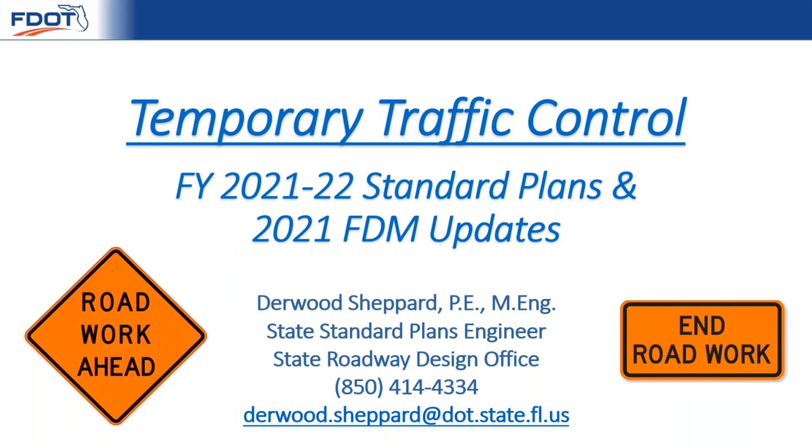Let me first start by explaining some of the reasons why the department has been making recent revisions to our temporary traffic control policy, standards, and specifications, and while we will continue to make needed changes to streamline current criteria and seek innovative solutions, the number one reason is safety.

As of the latest national data on work zone safety, the state of Florida currently ranks second nationally in work zone fatalities. As a result, Florida has become a focus state for the Federal Highway Administration, and the issue has become an emphasis area in the department's strategic highway safety plan. Of note, between 2016 and 2017, work zone fatalities increased by 3%, while all other highway fatalities were decreasing.

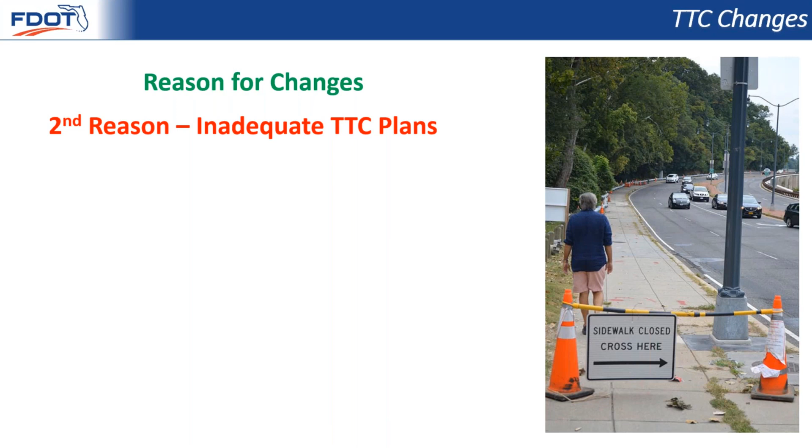The second reason for revisions to the temporary traffic control policy and standard plans is to address issues with inadequate temporary traffic control plans. This issue is primarily a construction contract plans related issue and deals with contract plans not having sufficient or consistent details.

However, there also tends to be a considerable amount of confusion between designers, inspectors, contractors, and maintenance personnel over their responsibilities, which can be attributed to redundant, misplaced, and contradictory information within the department's policy and contract documents, including the standard plans and standard specifications.

Furthermore, there has also been an over-reliance and misapplication of the standard plans typical applications, along with issues of consistency between the typical applications included in the standard plans.

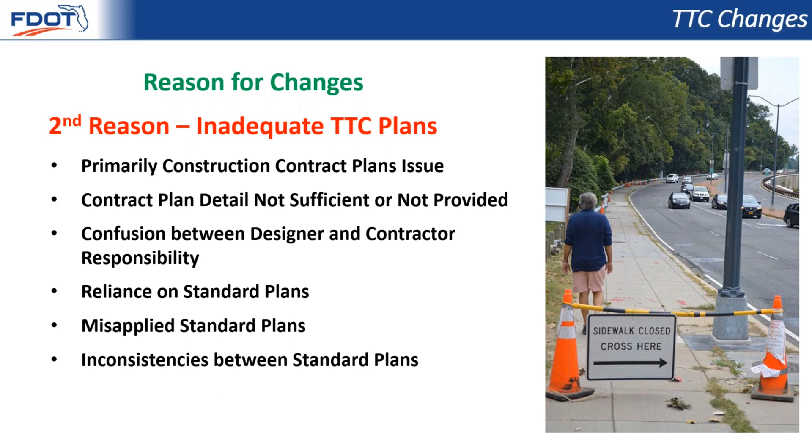Accommodating all users has historically also been an issue. Bike and ped accommodations have been left almost entirely up to the contractor to provide, and with little or no direction in the contract plans, proper accommodations are not being made.

Finally, we also want to try and reduce the amount of construction-related claims and pay item overruns. Through more consistent, simplified, and streamlined temporary traffic control standards, the department aims to better communicate intent, avoid redundancy, and better impress upon all users that the temporary traffic control typical applications are rudimentary and likely require supplemental project-specific TTC plans and/or proper judgment from the worksite traffic supervisor to sufficiently execute temporary traffic control operations.

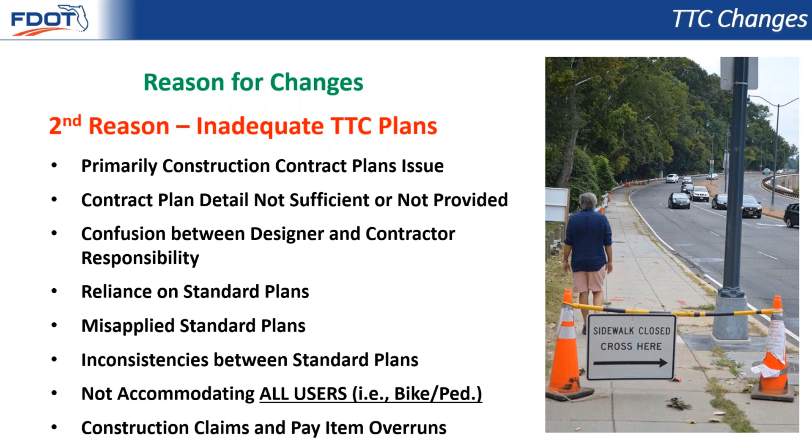As a general overview, I would like to take a few minutes to discuss some of the relevant governing documents pertaining to temporary traffic control operations on the state highway system. It's important to understand how these documents work together and how important it is to use these documents in combination with each other.

Starting with the standard plans, the first set of indexes included are 102-100, 102-110, and 102-120, which provide information for temporary barriers.

Then we have index 102-600, which includes the general information for traffic control through work zones and applies to all temporary traffic control operations on the state highway system, including but not limited to the standard TTC applications included within the remaining 102 series of indexes. That is, regardless of whether or not indexes 102-601 through 102-680 are used, the requirements of index 102-600 still apply.

Furthermore, indexes 102-601 through 102-680 include rudimentary standard TTC applications which cover common yet basic typical traffic control operation details. These rudimentary details work well for simple construction and maintenance operations, but often have to be used in combination with one another or supplemented with more specific project TTC plans.

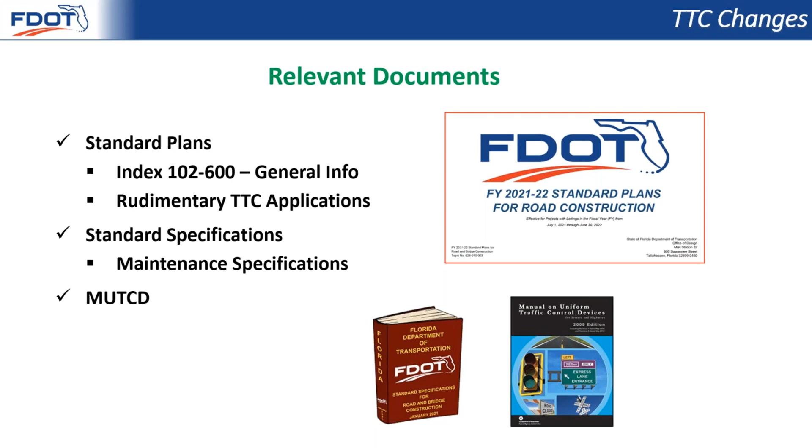In addition to the standard plans and specifications, there is the Manual on Uniform Traffic Control Devices, also known as the MUTCD, which includes the minimum requirements for all traffic control devices, i.e. signs, pavement marking, signals, and other traffic control. The MUTCD is the minimum national standard for all public roads and must be followed in accordance with the Code of Federal Regulations. Part 6 of the MUTCD provides the minimum requirements for temporary traffic control. While the standard plans and specifications have standardized and adopted many of the topics covered in the MUTCD, it is important to understand that some requirements are only found in the MUTCD.

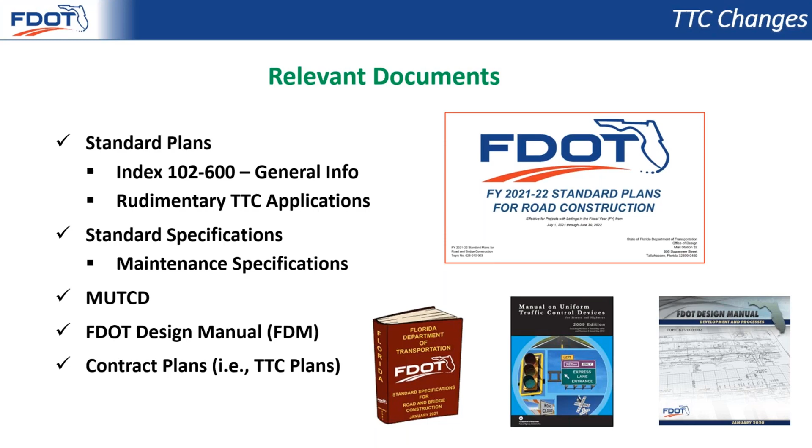Finally, there is the FDOT Design Manual, also known as the FDM, which provides the department's design criteria for transportation management plans and temporary traffic control plans included in the contract documents. FDM chapters 240, 241, 242, and 243 also include requirements for items such as lane closure analysis, traffic pacing design, portable changeable message signs, detours, guidelines for non-motorist accommodations, and temporary traffic control pavement markings, to name a few. The FDM requirements are to be used in the development of all TMPs and temporary traffic control plans used on the state highway system. The FDM and temporary traffic control plans are typically not needed for normal maintenance operations.

To highlight the importance of using all relevant documents, I wanted to provide a few examples of how the standard plans and specifications must be used together. The following examples are requirements only found in the specifications, and include the MUTCD reference for conditions not addressed in the standard plans or contract plan: the requirements to maintain business and residential entrances, vehicle and equipment visibility requirements, requirements for traffic control officers, and traffic control device requirements such as crashworthiness, PCMS deployment, arrow board requirements, TMA test levels, retroreflective sign sheeting, and pavement marking placement and material requirements.

Next, I would like to walk through some of the components of the changes and highlight some of the informational resources available to explain some of the primary changes that affected the entire 102 series of standard plans.

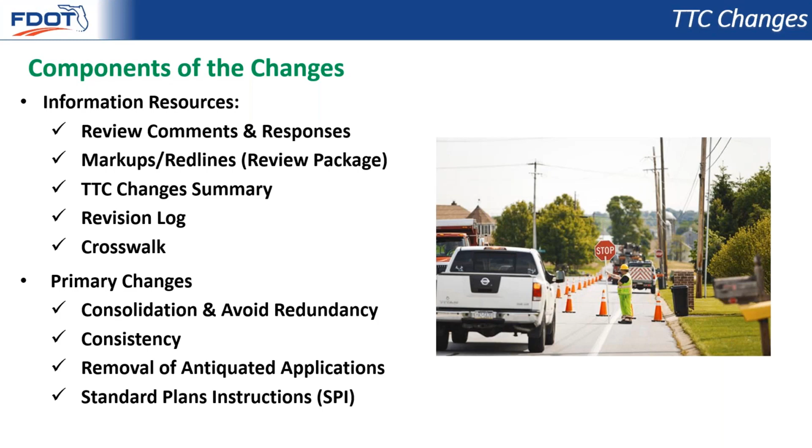The first resource I would like to mention is the review comments and responses included on the standard plans website. The review and response link on the standard plans webpage provides access to a complete list of all comments received during the standard plans internal, industry, and FHWA reviews, along with a response from the FDOT Central Office technical experts. These documents provide great examples of commonly asked questions during the review process. Some of these common questions and comments will be addressed throughout this webinar.

Also included in the review and response resources is a TTC Summary of Changes document. This summary document provides an overview of the changes made to each individual standard plans index in the 102 series.

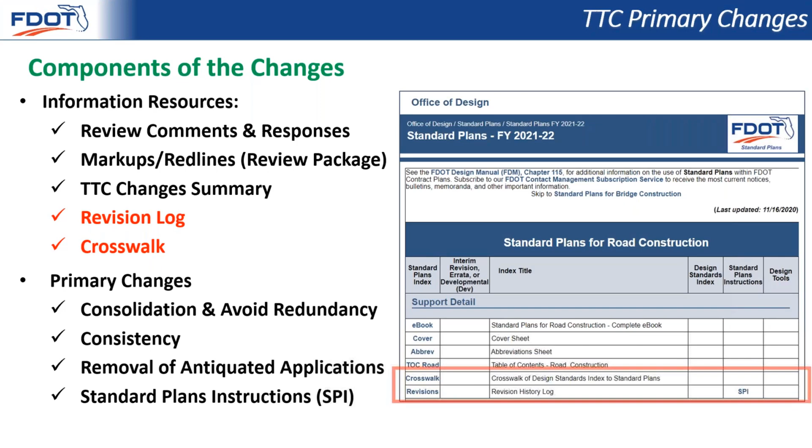The last two resources I'd like to highlight are the revision log and crosswalk. Both of these documents are included to provide information about the revision history for each release of the standard plan, and a crosswalk can be provided to be used when indexes are consolidated, renamed, or renumbered. As an example, Index 102-605 has been consolidated with Index 102-604. The crosswalk provides a resource for cross-referencing this type of information.

As previously mentioned, there are some overarching primary changes that occurred to the entire 102 series of indexes. These changes include consolidation of similar types of information to avoid redundancy in an effort to simplify and streamline the overall series. Removing redundancy helps to improve understanding of intent and avoids confusion, which can occur when requirements and details are stated differently in separate locations. Throughout the indexes, many of the redundant notes were removed, and in total, 12 indexes were consolidated. Consolidating information can help provide more consistency across the standard TTC applications.

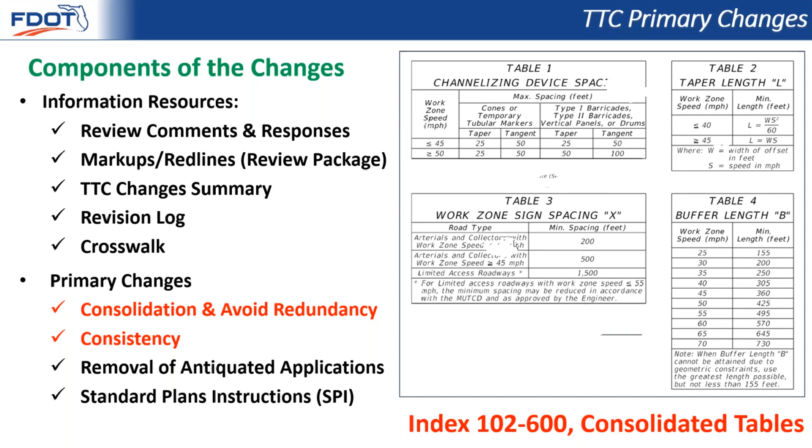One substantial example of consolidation is the consolidating of channelizing device spacing, taper length, work zone sign spacing, and buffer length tables to index 102-600. These tables now consistently apply to all of the standard TTC applications included throughout the 102 series, and by placing the tables within the general requirements of index 102-600, they now apply to all conditions included within the standard TTC application. This screenshot from 102-602 for work on the shoulders illustrates an example of how sign spacing dimensions are now consistently applied throughout the 102 series.

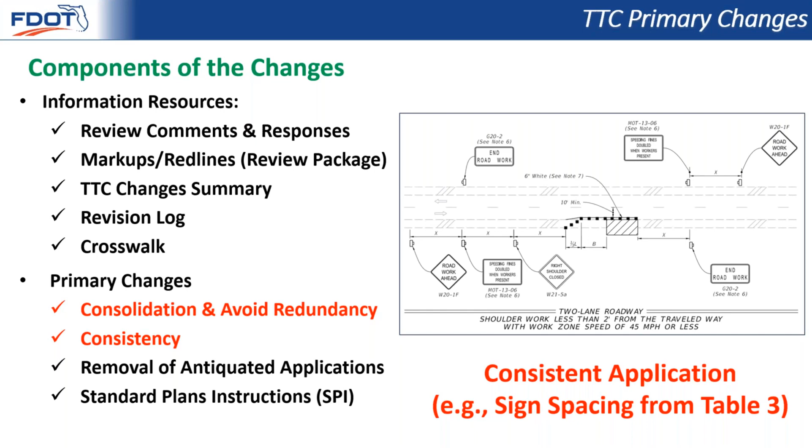Another primary change was the removal of antiquated or complex standard TTC applications. These include crossover details, which are the responsibility of the contractor to determine their internal traffic control plan for their equipment and vehicle movement; complex conversions or diversions, which would require site-specific TTC plans; and toll plaza operations, which are becoming antiquated with new tolling technologies. In total, 7 indexes were deleted.

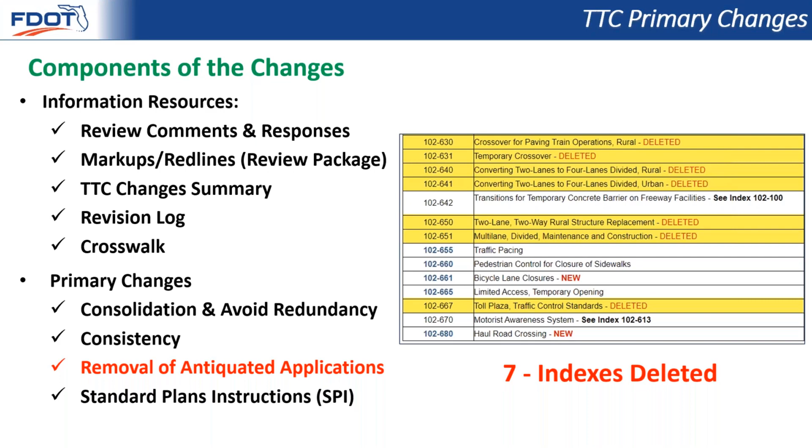The final overarching change to the 102 series is the addition of standard plans instructions for the entire series. Standard plans instructions are documents used to communicate the basis and limitation of an individual or group of indexes. The information includes design criteria used to create the index or indexes, assumptions and limitations for the use of the details, requirements for plan content needed to properly communicate usage in the contract plan, pay items used for the compensation of the details, and any other pertinent background information or examples that can be used to help with the user's understanding or implementation of the index's details. Shown is an example of the new 102 series standard plans instruction.

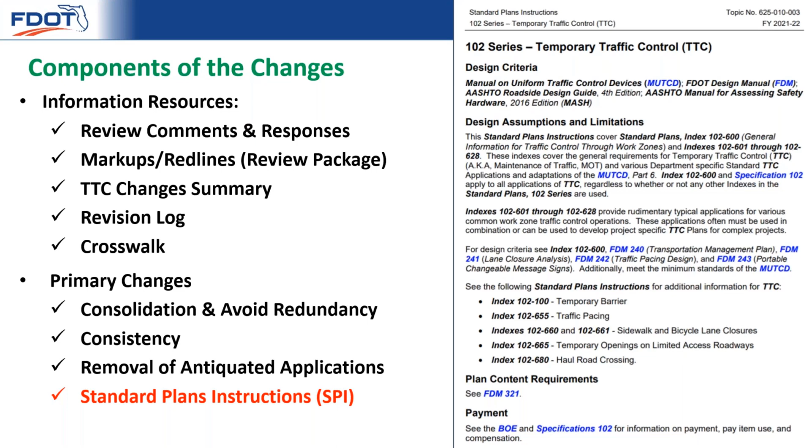I would now like to take some time to further highlight some of the specific changes made to the standard plan and address some of the common questions we received during the review process.

I previously mentioned the consolidation of device tables to index 102-600. However, I would like to take some time to show these tables in more detail.

Table 1 covers channelizing device spacing and provides a consistent yet conservative standardization of the device spacing guidelines included in the MUTCD. It should be noted that if site-specific conditions or issues arise, the worksite traffic supervisor or the engineer has the ability to alter channelizing device spacings to best suit the needs of the operation.

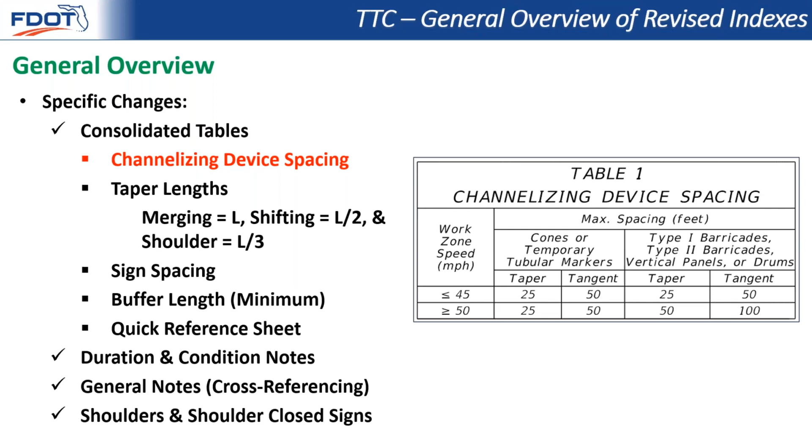Table 2 covers taper length. This table provides equations for the determination of the proper taper length for variable L. However, it is important to understand the consistent application of taper lengths throughout the standard plan.

As required by the MUTCD, taper lengths are detailed throughout the standard TTC applications as follows: the full value of L should be used for merging tapers. Shifting tapers use half the value of L, and shoulder tapers use a third of the value of L.

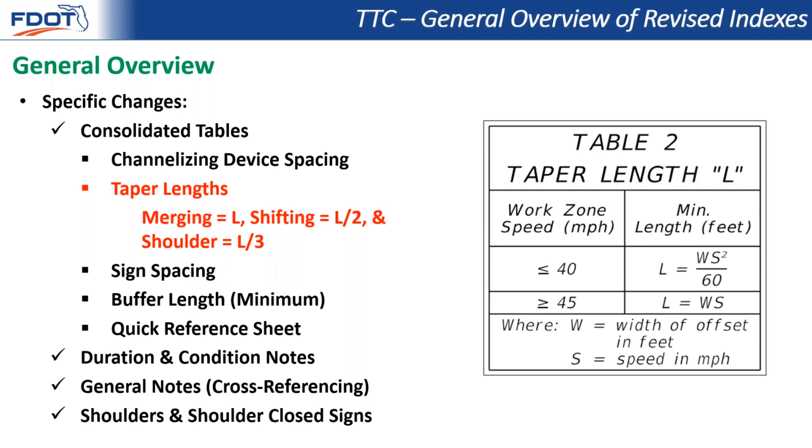One of the most significant consolidation efforts within the traffic control device tables involves Table 3, work zone sign spacing. These spacings are now indicated by variable X within the standard TTC application. These values will provide a consistent spacing for all temporary signs used within work zones and represent a standardization of the sign spacing guidelines included within the MUTCD.

One exception is made in the footnote, which states that for limited access roadways with work zone speeds less than 55 miles per hour, the minimum sign spacing may be reduced in accordance with the MUTCD and as approved by the engineer.

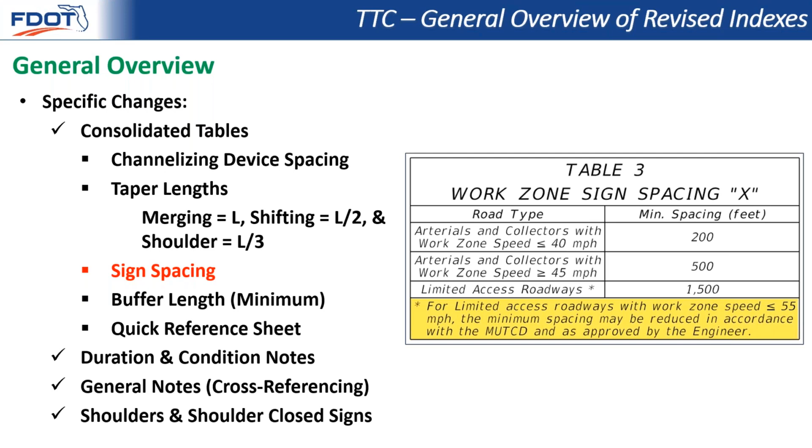Table 4 provides buffer lengths indicated by variable B. These values remain unchanged from previous versions of the temporary traffic control standard.

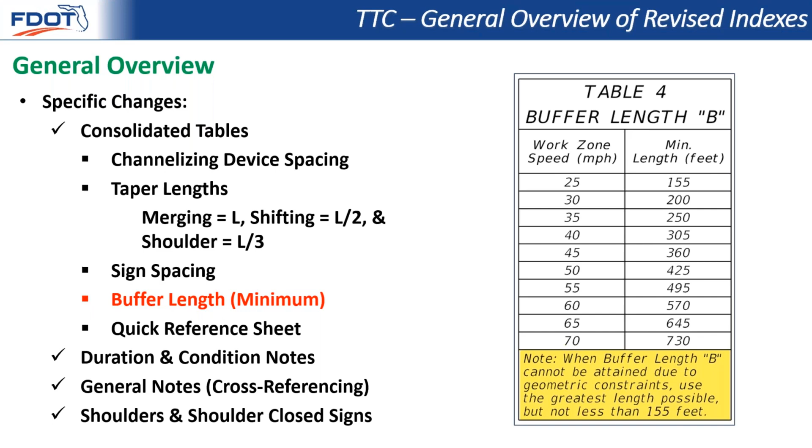The footnote included on Table 4 states that when buffer lengths cannot be attained due to geometric constraints, the greatest length possible is to be used, but not less than 155 feet. This note was previously included in the general notes of various standard TTC applications, but was inconsistently applied. Through inclusion on index 102-600, the note now applies to all standard TTC applications.

In an effort to provide a user-friendly version of the traffic control device tables, a quick reference sheet for the 102 series tables is available on the Standard Plans website at the link highlighted here. This quick reference sheet is provided in a standard 8.5 by 11 paper size format for easy printing as a reference guide by field personnel on a construction or maintenance job site.

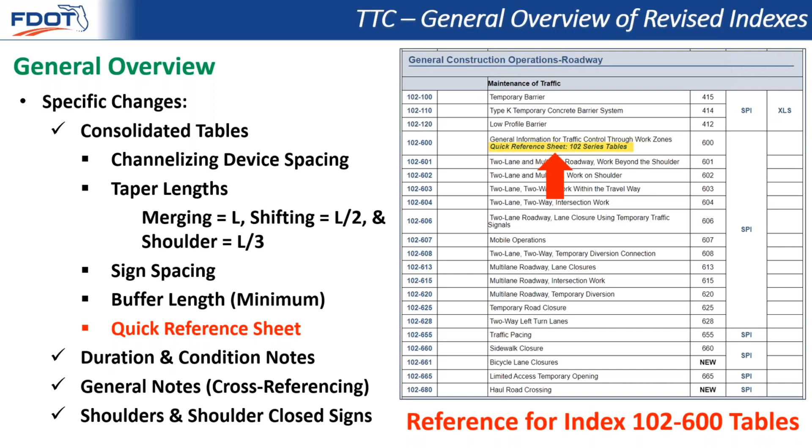Table 2 on the quick reference sheet includes the addition of example L values. As shown, these example L values are provided for common widths and work zone speeds, which range from 25 to 65 miles per hour and widths of 5, 10, and 12 feet to represent common paved shoulder and lane widths.

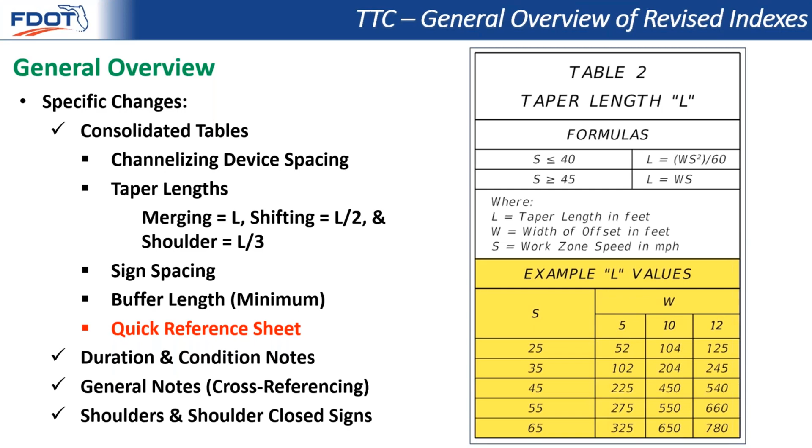It should be noted that these example values are provided to aid in common applications. However, for speeds or widths not provided, the equation should be used to determine the appropriate value of L.

The duration notes included in the previous standard plans provided operational time limits for conditions where various work zone traffic control devices may be omitted. However, it's important to understand that many of these duration notes have become outdated based on current requirements within the standard specifications, or they don't represent the department's current philosophy on best practices for advance notice of work zones.

For example, the standard specifications require all work vehicles and equipment within the work zone to have high intensity rotating, flashing, oscillating, or strobe lights in operation. Therefore, the usage of such devices no longer provides sufficient justification for omitting work zone traffic control devices. Likewise, road work ahead signs are now no longer considered optional based on duration.

The previous condition notes basically describe the details shown in the standard TTC application. However, these notes are considered redundant to the details and unnecessary, as the details in each index clearly illustrate the appropriate layout for the application included.

Where appropriate, the revised indexes now have general notes stating the intended usage for the application. For example, General Note 1 on Index 102602 reads, 'This index applies to two-lane, two-way, and multi-lane roadways, including medians of divided roadways with work on the shoulder.'

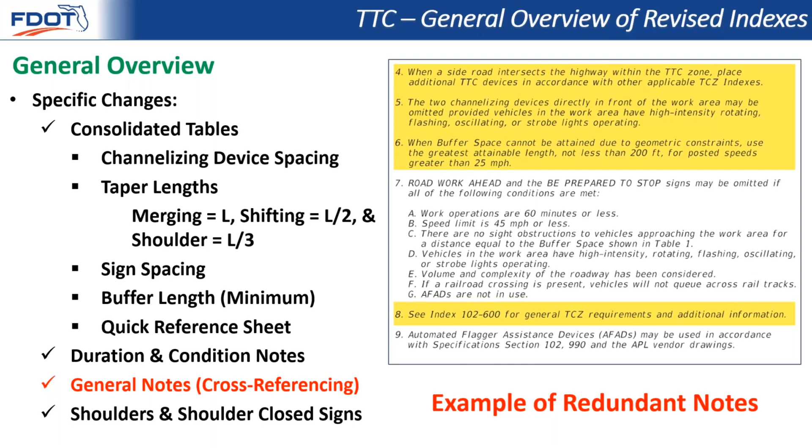The final overarching change I would like to cover is the depiction of shoulders and the use of shoulder closed signs throughout the 102 series standard TTC applications. As shown here in the new detail for a two-lane, two-way diversion, we now depict shoulders along the roadway and a continuation of those shoulders through the work zone. Maintaining shoulders through the work zone has historically been a part of our design requirements for temporary traffic control plans. However, shoulders were not previously specifically depicted within the temporary traffic control standard plans.

As with permanent conditions, providing shoulders through the work zone is a proven safety countermeasure for reducing crashes. The shoulder provides additional recoverable area for vehicles that depart their designated lanes. They help mitigate vehicles shying away from channelizing devices, and the shoulders also provide accommodation for non-motorists through the work zone. Both the FDM and standard specifications require that existing bicycle facilities must be maintained or detoured satisfactorily throughout the project limit.

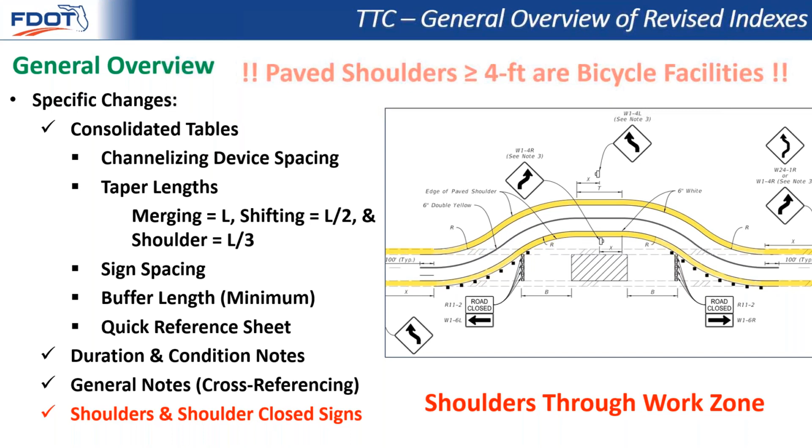Additionally, on the state highway system, with the exception of limited access roadways, all paved shoulders 4 feet or wider are considered a bicycle facility. Therefore, if an existing non-limited access facility has paved shoulders of 4 feet or more, the shoulder width is to be maintained through the work zone.

There are, however, certain roadway types and work operations where providing shoulder width is not practical. For example, a typical resurfacing project on a 2-lane, 2-way road using index 102-603 for work within the traveled way. This configuration would not have sufficient space to provide a shoulder on both sides of the 1-lane condition.

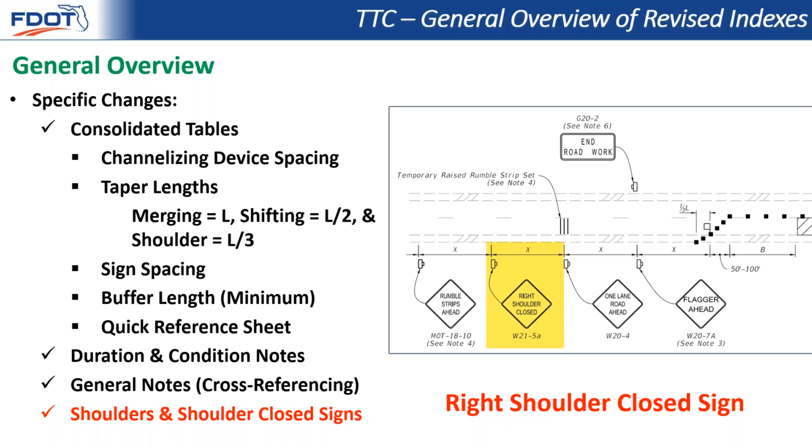Therefore, for conditions where providing shoulder width offsets is not practical, a right shoulder closed sign has been added to the advanced work zone sign array. As highlighted in the screenshot shown here from index 102602, the addition of the shoulder closed sign notifies motorists and non-motorists alike that the right shoulder is not available through the work zone.

The inclusion of shoulder closed signs within the standard TTC application does not absolve any responsible party for the requirement to provide non-motorist accommodations through the work zone. For short duration work, such as those common for maintenance operations, providing accommodations may not be practical or warranted. However, for long-term lane and shoulder closures, it may be appropriate to provide additional accommodation by means of a detour, diversion, or temporary path.

For this reason, every index within the standard TTC applications that have potential for impacting an existing bicycle facility, the note highlighted here has been added. The note reads, if the work encroaches on a marked bicycle lane or rideable shoulder, close the lane or shoulder in accordance with the plans.

This note is added to ensure that proper advanced consideration of bicycle accommodations is made during the planning and design phase prior to the execution of work operations. Rideable shoulder is referring to paved shoulders 4 feet or wider on non-limited access as mentioned previously.

Additionally, a new bicycle lane closure standard plan index has been created to establish standardized temporary traffic control devices for the closure of marked bicycle lanes and rideable shoulders. More information on this new index will be provided later in the webinar.

I will now walk through the 102 series and highlight some additional revisions made to the specific indexes. By and large, these additional changes cover topics not previously talked about.

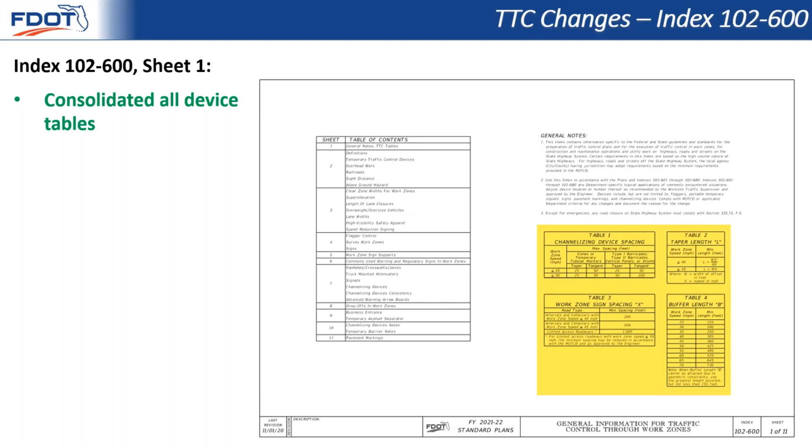Starting with index 102600, the first change highlighted is one we have discussed previously, but I thought it would be good and helpful to show you what the consolidated traffic control device tables look like, which are now included on sheet 1 of the general information index.

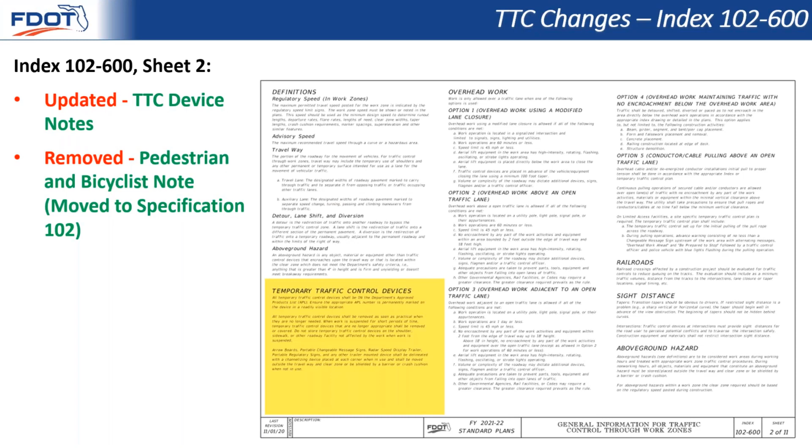On sheet 2 of Index 102600, there has been a revision to the temporary traffic control devices and pedestrian and bicycle notes. The temporary traffic control devices note has been updated to address the storage of traffic control devices when they are not in use.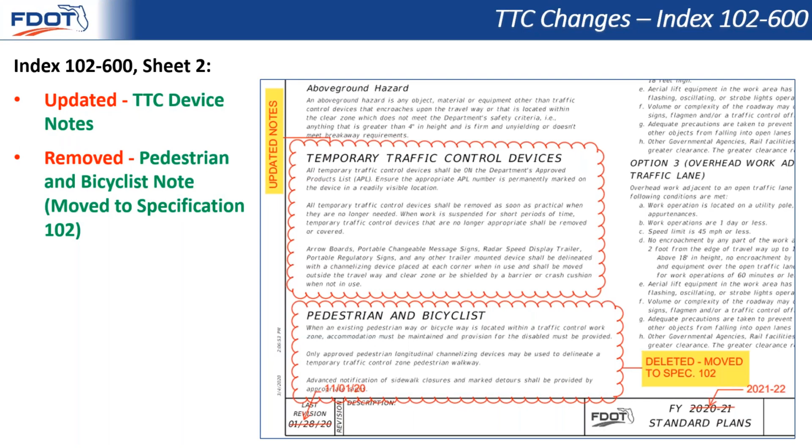The pedestrian and bicycles note was removed from Index 102600, and the information was consolidated with the bicycle and pedestrian accommodation requirements within standard specifications section 102.

The temporary traffic control devices note now includes the following additions: do not store temporary traffic control devices on the shoulder, sidewalk, or other roadway facility not affected by the work when the work is suspended.

This additional note was added to address issues with storage of temporary traffic control devices outside of the traveled way when staging for future deployment or when work is temporarily suspended. Devices stored on the shoulder, sidewalk, or other usable facility may eliminate existing accommodations for motorists and non-motorists alike, which is not acceptable.

On sheet 3 of Index 102600, a footnote has been added to the clear zone widths table. There's a minor revision to the lane widths note, and the notes for regulatory speeds in work zones have been revised to add a new detail for speed reduction signing.

The new footnote on the clear zone widths table reads: for temporary conditions where existing curb has been removed but not reconstructed, curb and gutter values may be used.

This note was added to address locations where the original and final conditions include curb. However, a temporary condition with no curb may exist. For this condition, it is often not practical to adjust the clear zone width requirements for the temporary condition.

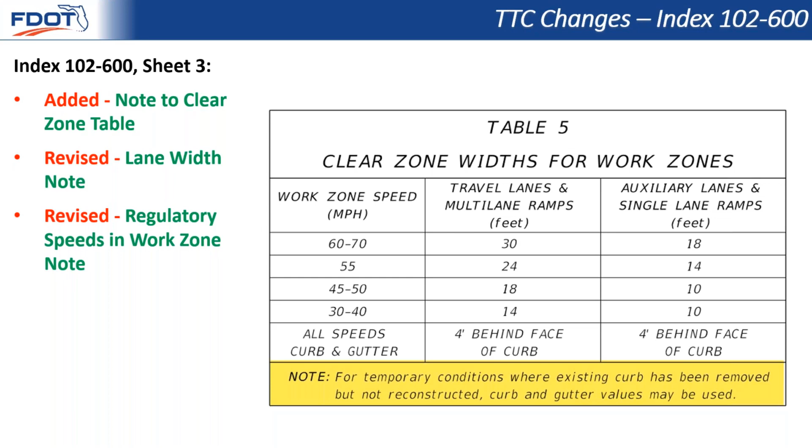The lane width note had a minor revision that changed the term freeways to limited access roadways, which is a more commonly used term within the standard plans and specifications.

The final change on sheet 3 of Index 102-600 includes revisions to the notes for regulatory speeds in work zones. The previous notes included a mixture of direction to the designers and the contractor.

The notes included requirements for designers to determine the regulatory speed during the development of the temporary traffic control plan, guidance on the placement of additional speed reduction signing, and direction to the contractor when they believed that field conditions warranted speed reductions different from those included in the temporary traffic control plan.

The revised details on sheet 3 now only include the details and notes necessary to install speed reduction signing. Criteria and guidelines for the establishment of regulatory speeds in work zones, as determined by the designer, are now included solely in FDM Chapter 240.

Since the standard plans are a construction document and the FDM is a design criteria document, it is more appropriate for criteria for establishing regulatory speeds to be located in the FDM. Direction to the contractor for the requirements of submitting a speed reduction warrant have been moved to standard specification 102.

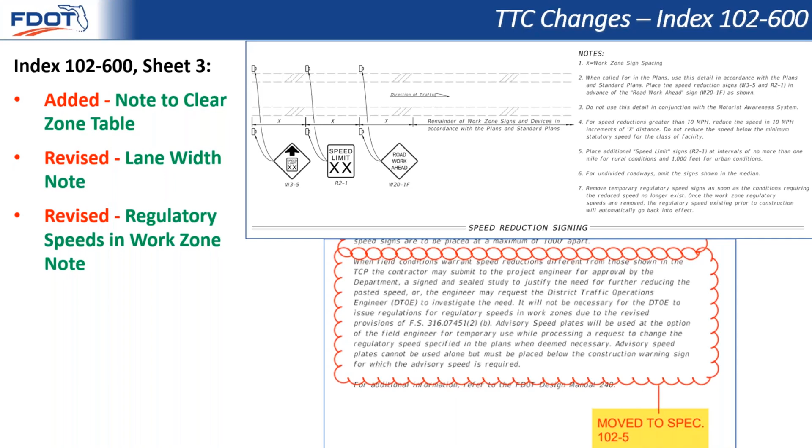On sheet 7 of Index 102-600, the notes for removing pavement markings have been deleted as the notes were redundant to the conflict pavement marking requirements included in subarticle 102 5.8 of the standard specification.

Additionally, the notes for signals was revised to remove the maintenance requirements for existing traffic signals because the notes are redundant to subarticle 102 9.15 and 102 9.16 of the standard specification.

Finally, the notes for portable changeable message signs were also deleted as the information is redundant to or consolidated with the FDM and standard specifications.

Sheet 11 includes the final change to Index 102-600, which now includes an added detail for RPM placement on multi-lane roadways. This detail was added to clarify RPM placement for conditions other than a 2-lane roadway.

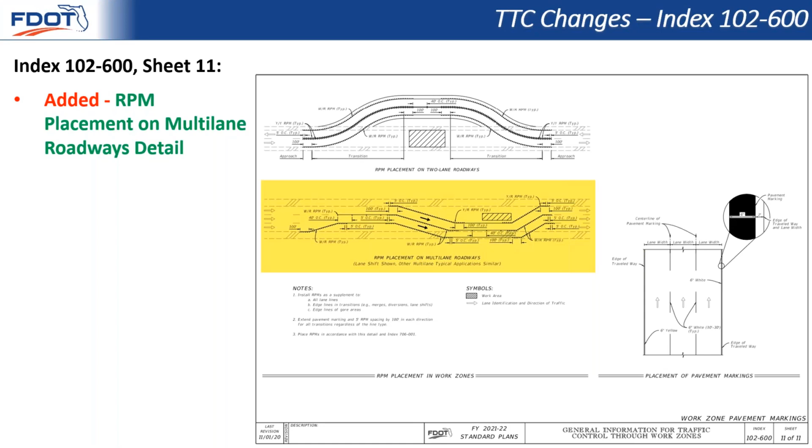I would also like to point out that RPM placement in work zones are installed as a supplement to temporary pavement markings. If temporary pavement markings are not required, then RPMs would also not be required.

Now we will start to cover changes to the remaining indexes in the 102 series and cover specific standard TTC applications. As stated previously, these standard TTC applications are rudimentary operational layouts of temporary traffic control devices. They are intended to provide solutions for basic operations and establish standard placement details for various configurations of temporary signs, channelizing devices, pavement markings, and other work zone related traffic control devices.

These standard TTC applications often have to be used in combination, supplemented by additional contract plan details and notes, or superseded by project-specific details for complex traffic control operations.

As we move through the remaining indexes in the 102 series, we will only be covering specific content changes that affect the individual index. The overarching changes covered previously in this webinar, that is sign spacing, device tables, and removal of redundant notes, will not be covered index by index.

The first index in the series I'm going to cover is Index 102-100. This index covers general temporary barrier requirements, which apply to all temporary barriers with the exception of low-profile barriers. However, it does include Type K barrier and any of the alternative temporary barriers available on the approved products list.

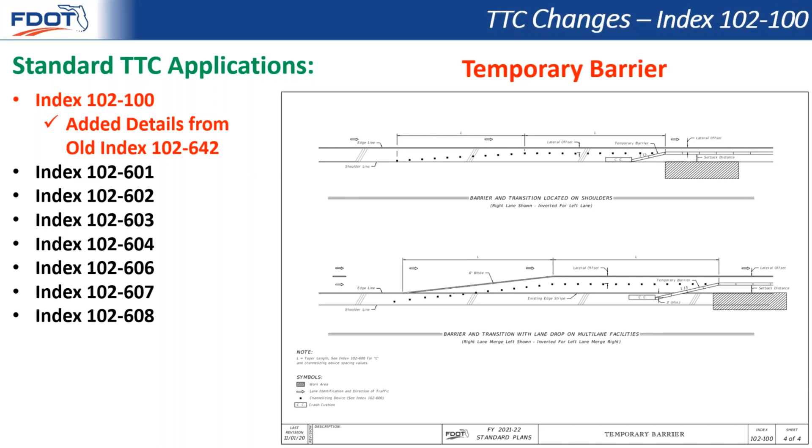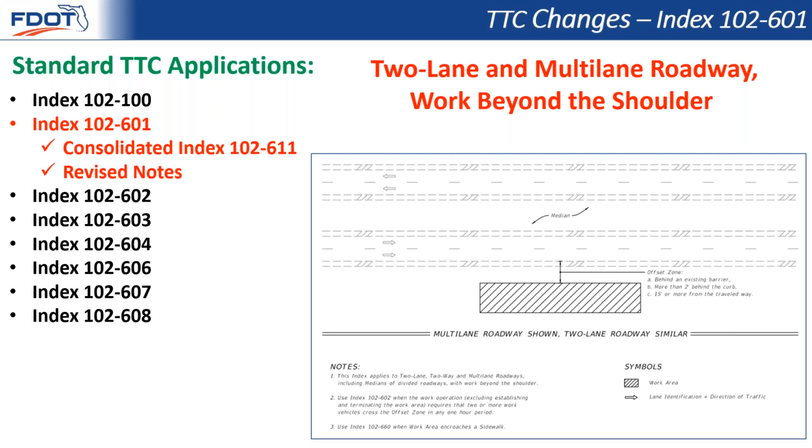Index 102-601 is the first in the series covering operational applications and covers work beyond the shoulder. The primary changes to this index included consolidation with old index 102-611 and retitling the index 2-lane and multi-lane roadway work beyond the shoulder. Both index 102-601 and 102-611 cover the exact same applications with virtually the same notes and details. Therefore, the applications have been consolidated for simplification and to avoid redundancy.

Like index 102-601, the operational details for work on the shoulder are very similar for both 2-lane and multi-lane roadways. Therefore, indexes 102-602 and index 102-612 have been consolidated into a 2-lane and multi-lane work on the shoulder index. There's also an additional scenario that has been added to index 102-602, which covers shoulder work less than 2 feet from the traveled way for work zone speeds 45 miles per hour or less. Previously, if work was within 2 feet, the only alternative was to close the lane. This additional application will provide some additional flexibility for low-speed roadways, but does require a lane width reduction to 10 feet.

We will now move to index 102-603, 2-lane, 2-way work within the travel way. This index covers a lane closure of a 2-lane, 2-way roadway using flaggers. The primary change within this index was the consolidation of the with and without details for temporary raised rumble strips into a single detail located on sheet 1. The conditions for which raised rumble strips are required has not changed. That is, for posted speeds 55 miles per hour or greater and work durations greater than 60 minutes. However, for simplification, one detail is provided illustrating a with temporary rumble strips condition, and note number 4 directs the user to eliminate the rumble strips ahead sign and associated sign spacing when they are not in use.

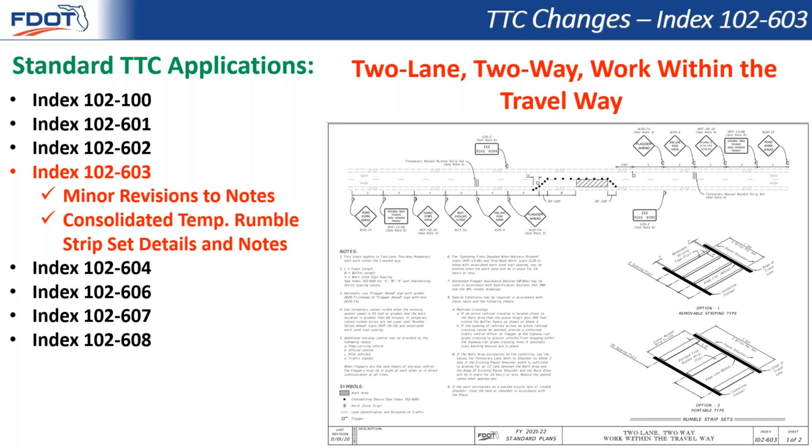The next index we'll cover is 102-604. This index covers 2-lane, 2-way intersection work and is a consolidation of old indexes 102-604 and 102-605, which address work near or within intersections. These details remain relatively unchanged.

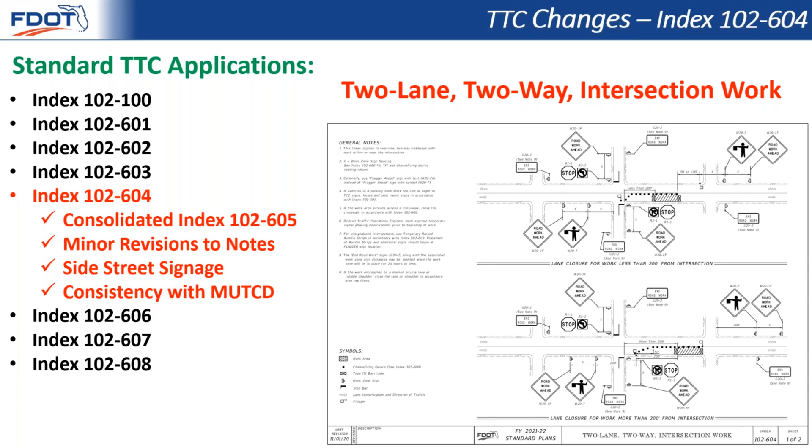However, there are a couple revisions to address side street signage to make the details more consistent with the MUTCD. As can be seen on sheet 1 of the new index, which covers work near an intersection, side street sign details have been added to address appropriate advanced warning and operational controls. The new signs included are the roadwork ahead, end road work, stop signs, and a restricted turning movement sign. These new signs have been added to clarify that flaggers should not be used to control multiple directions of travel, which would be a violation of the flagging procedures outlined in the MUTCD. That is, the flagger must always be facing the road user for which they are controlling. That would not be possible if the flagger is trying to control road users from side roads and the mainline roadway at the same time.

Likewise, the details shown on sheet 2 for work in an intersection have also been updated to include a flagger for each leg of the intersection for which the work zone is located. Again, this change is made to ensure that the flagging operations can be performed in accordance with the procedures outlined in the MUTCD.

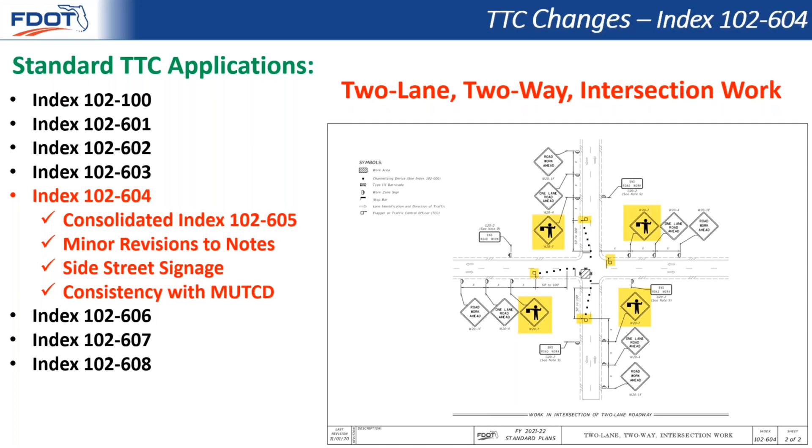Next, we will take a look at index 102-606 for a 2-lane roadway lane closure using temporary traffic control signals. Revisions to this index include the addition of temporary raised rumble strips and associated signing, and the elimination of separate details for bridges and side roads. Also of note, haul road details have been removed and added to a new index, which will be covered later in this webinar.

Highlighted here on sheet 1 are the additional temporary raised rumble strip details and a new intersecting side street detail. The temporary raised rumble strip details were added to ensure proper location of the devices and associated signage in relation to other advanced work zone signs. The side road intersecting the work zone detail, which provides a flagger control configuration for side roads, was added to provide a simple operational solution for side roads within the lane closure.

As you may recall, the previous index provided details for intersecting side roads, which utilized a combination of temporary signals and flaggers. However, those details would require a complete signalization plan for proper implementation and successful operation. While similar layouts would be a reasonable approach, they should be implemented with a project-specific TTC plan.

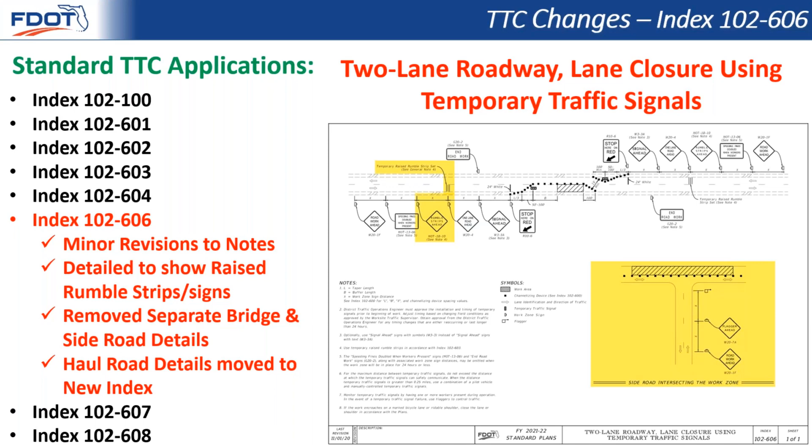The short bridges detail was also deleted from the previous index. Locating temporary traffic control devices at a bridge, regardless of length, is no different than determining site-specific layouts for other conditions. For example, when lane closures fall near tight horizontal curves, existing structures prevent placing signs in the ideal location, or tapers are extended to account for sight distance issues. Every TTC application is unique, and the standard plans cannot address all possible scenarios.

We will now review the changes to Index 102.607. The revisions include the consolidation of two-lane, two-way, and multi-lane mobile operations into a single index. Sheet 1, shown here, provides the general notes and operational details for two-lane work. Additionally, the general notes and details have been simplified to avoid confusion with the previous options for shadow vehicle placement and to provide a more consistent execution of mobile operations.

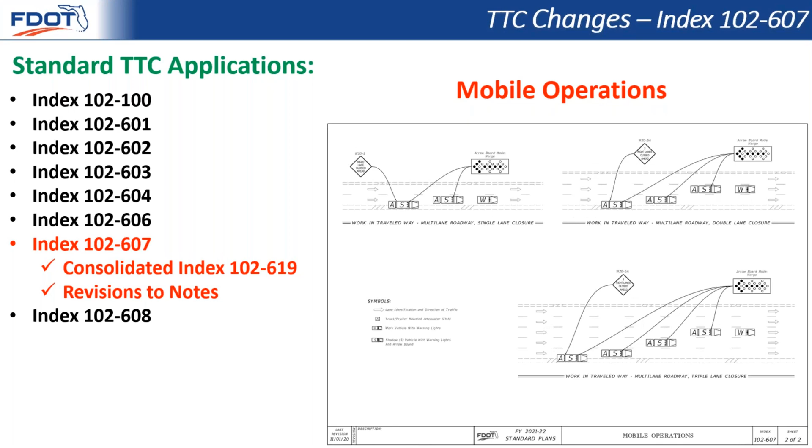The previous index had ranges and distance between work, shadow, and advanced warning vehicles. However, those have been removed, and Note 5 now directs the user to minimize the longitudinal space between vehicles to deter road users from driving between. Sheet 2 of Index 102.607 includes the multi-lane mobile operation detail.

Index 102.608 covers two-lane, two-way temporary diversions. As can be seen, there are no significant changes to this index otherwise than the overarching revisions mentioned previously. For example, simplified notes, sign spacing consistency, and illustrating shoulders through the work zone. It should be noted that diversions often require speed reduction signs to be added.

If applicable, the new reduced sign spacing details on sheet 3 of Index 102.600 should be used. I would also like to point out and remind you that applications such as this require a project-specific TTC plan to detail the geometric configuration of the diversion. Depending on the project-specific requirements, additional temporary traffic control devices may be needed. For example, temporary barriers or additional channelizing devices if the work area is within the clear zone of the diversion's traveled way.

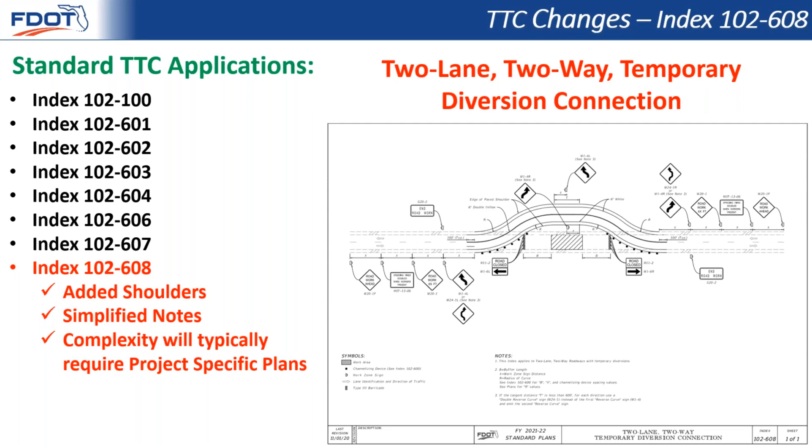The next index in the 102 series we'll cover is Index 102.613, multi-lane roadway lane closures. This index now includes a consolidation of all multi-lane lane closure standard TTC applications previously included within indexes 102.613, 102.614, 102.623, and the motorist awareness system details from Index 102.670.

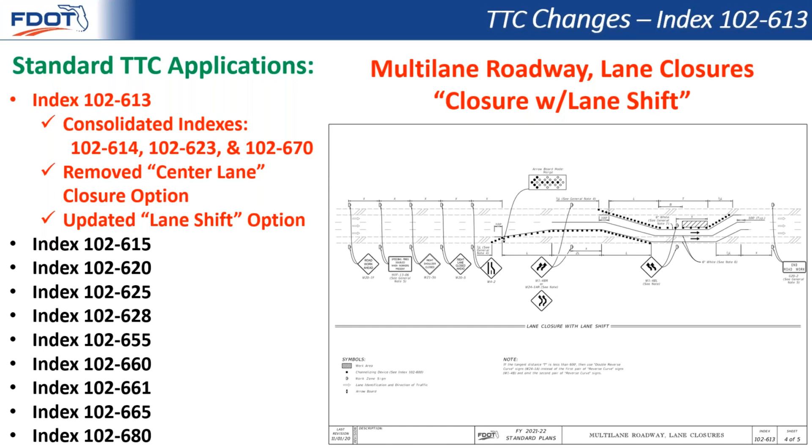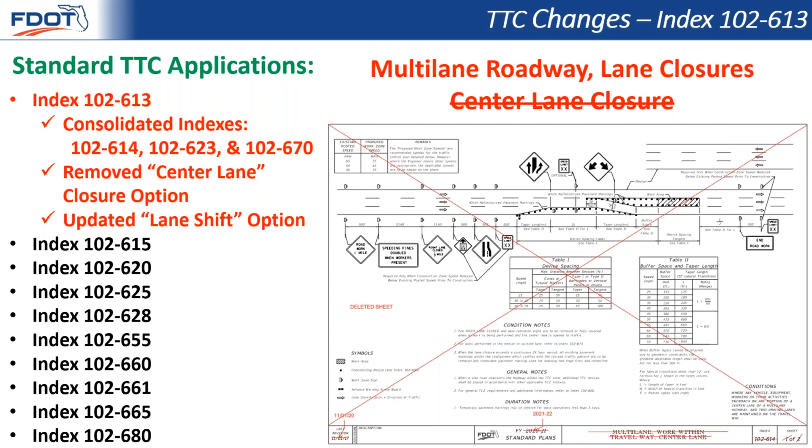Another revision that should be mentioned is the removal of the center lane closure standard TTC application from the previous version of Index 102.614. While center lane closures are an option in the MUTCD with typical application TA38, this is not a preferred option for the department. Therefore, the application has been deleted as an FDOT standard TTC application.

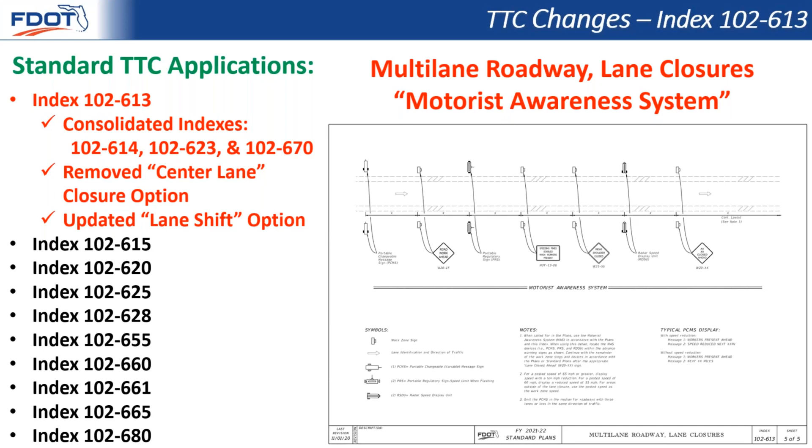Finally, for Index 102.613 is the addition of the Motorist Awareness System details, also known as MAS, from old Index 102.670. These details were simplified and added to the new Index 102.613 because the MAS is only used with multi-lane roadway lane closures and could only be used as part of the now consolidated options included herein.

As seen here, the details now simply show how the portable changeable message sign, portable regulatory sign, and radar display unit fit within the standard advanced work zone signage. The appropriate signing and channelization layout would then continue after the applicable W20 sign.

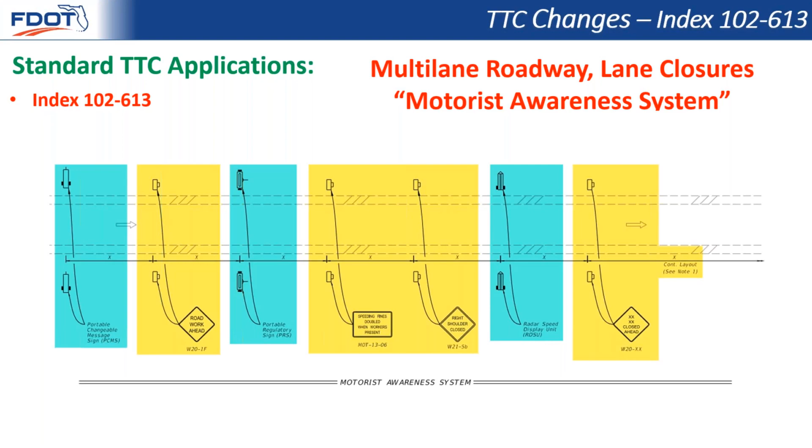The next index we will cover is 102.615, multi-lane roadway intersection work. As with the two-lane, two-way intersection work, all of the multi-lane intersection standard TTC applications have been consolidated, which include indexes 102.616, 102.617, and 102.618. All of the scenarios previously covered in these indexes are now included within index 102.615.

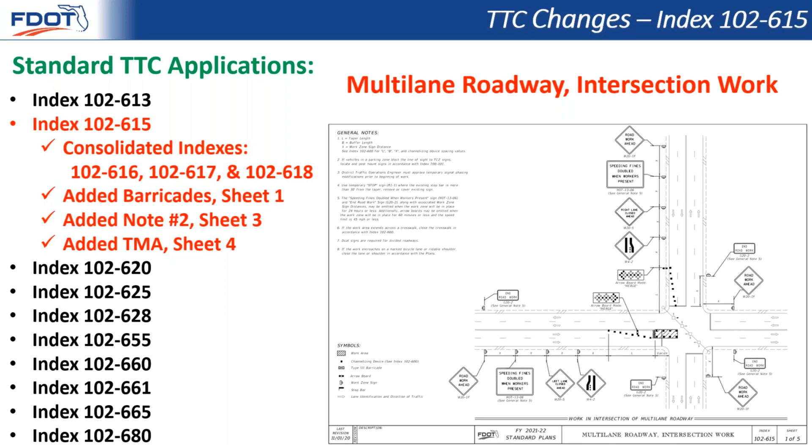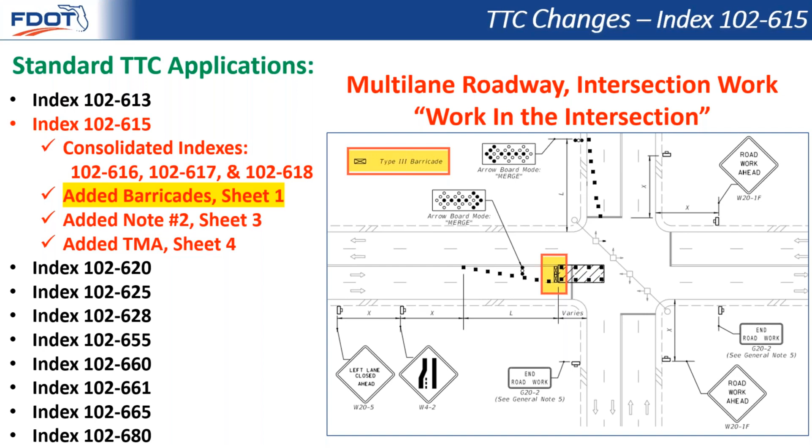There are, however, a few minor revisions to the previous details that I would like to highlight. The first is the addition of Type 3 barricades in advance of the work zone, as shown on Sheet 1, for work in the intersection. These barricades were not previously shown on the old Index 102.615 details, which was inconsistent with other standard TTC applications.

We have also added a new queue length reference and note on Sheet 3 for the application covering a left lane closure through an intersection where turning movements are allowed. As highlighted here, note number 2 now directs users to provide sufficient queue length so that left turning vehicles do not block the remaining through lanes. This language is consistent with the guidance given in the MUTCD.

The final revision to Index 102.615 is the application covering center lane closure shown on Sheet 4. This standard TTC application now calls for the use of a shadow vehicle and TMA within the buffer space in advance of the work zone.

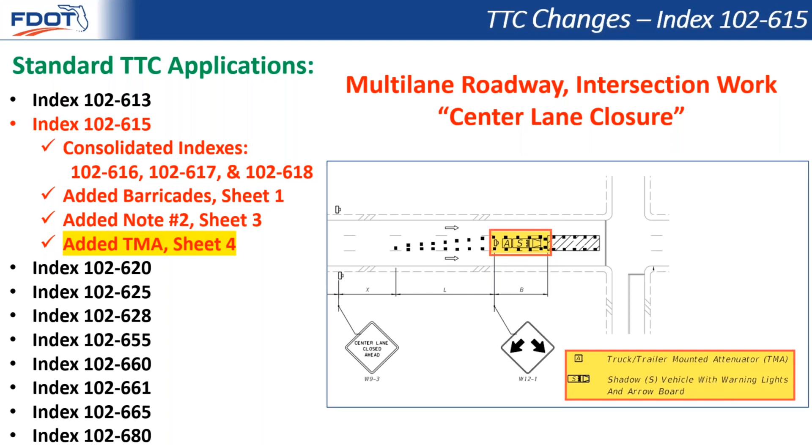We will now cover multi-lane roadway diversions included within Index 102.620. As with the two-lane, two-way diversion details discussed earlier, multi-lane diversions also require project-specific TTC plans. Therefore, Index 102.620 has been simplified to communicate the basic requirements for signage and channelization.

General note number 6, however, allows for a temporary lane separator to be used as an alternative for work zone speeds of 45 miles per hour or less. I would also like to again reiterate that site-specific diversion plans may require the use of additional temporary barrier or other temporary traffic control devices depending on the geometric layout and/or proximity of the temporary traveled way to the work area.

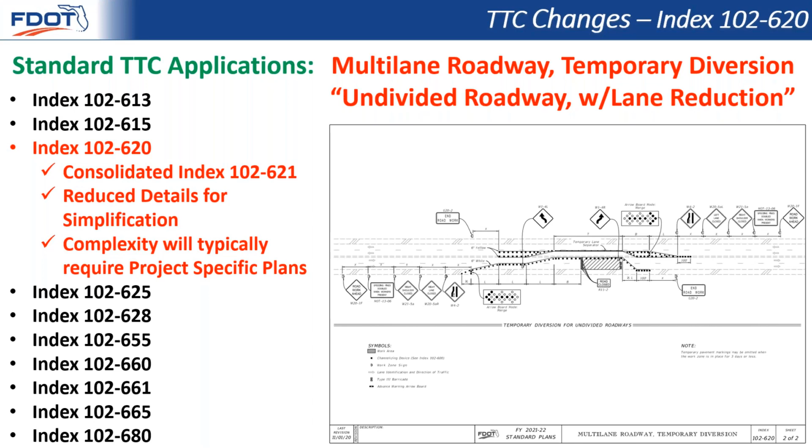Sheet 2 of Index 102.620 includes a diversion of an undivided roadway with a lane reduction in both directions. This detail is an adaptation of old Index 102.621.

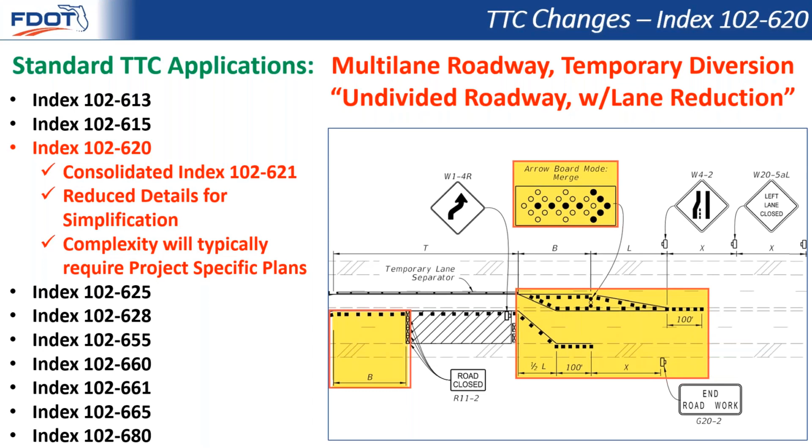As highlighted here, the details for the undivided roadway diversion were revised slightly. A buffer space was added to the near side approach to the work area, and the channelizing device configuration on the right side of the detail was also updated for consistency with other standard TTC applications in the MUTCD.

Index 102-625 covers temporary road closures. The details and notes were simplified for consistency with other standard TTC applications in the 102 series.

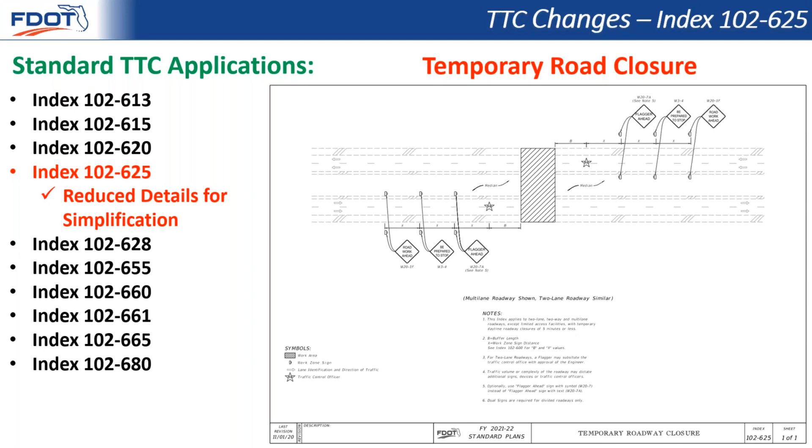Index 102-628 covers roadways with two-way left turn lanes. This index previously only covered the closure of the turn lane, which most often did not provide for a practical work area without encroaching into either one or both inside lanes.

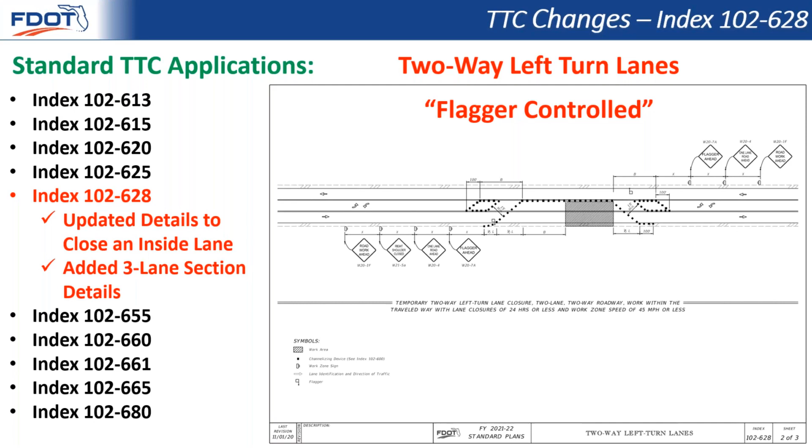The index was also expanded to include new standard TTC applications that cover 3-lane sections. That is, a 2-lane, 2-way roadway with a 2-way left turn lane. The first application shown here on Sheet 2 provides for a 2-way flagger controlled operation.

And Sheet 3 provides an application for the closure of one through lane and shifts traffic into the 2-way left turn lane. Both of these new standard TTC applications are limited to operations with durations of 24 hours or less and work zone speeds of 45 miles per hour or less.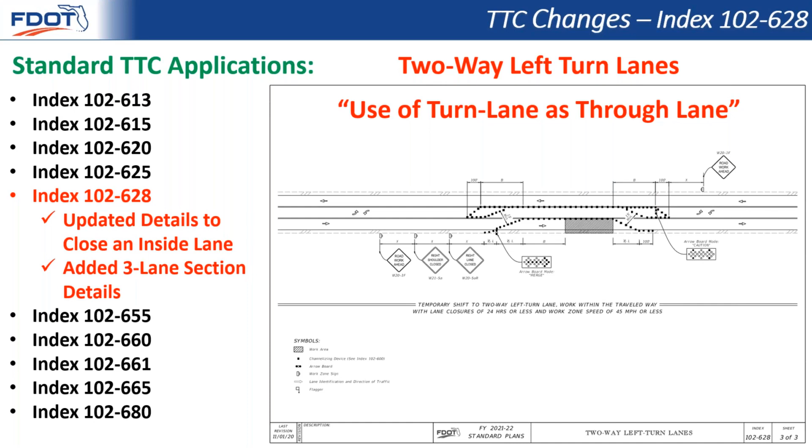As such, Index 102-655 was updated to include only the standard information needed to execute a traffic pacing operation in concert with the temporary traffic control plan.

It should also be noted that the examples that were previously included on sheet 2 of the old index were moved to the standard plan's instructions provided along with the index on the standard plan's website. Since this information was intended to provide helpful guidance on how to initiate the operation and not the required procedure, the standard plan's instructions are a more appropriate location for the examples.

The next index we'll cover is 102-660 for sidewalk closures. This index provides very basic requirements for the advanced sidewalk closure signing and traffic control devices needed for a pedestrian detour, a temporary pedestrian path, or a temporary diversion into the traveled way.

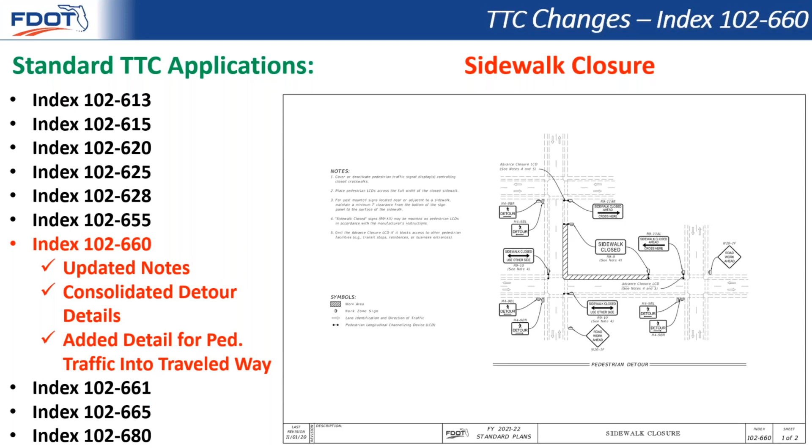Sheet 1 shown here includes the pedestrian detour. Sheet 2 provides the temporary pedestrian way detail and a new detail for temporary pedestrian diversion into the traveled way.

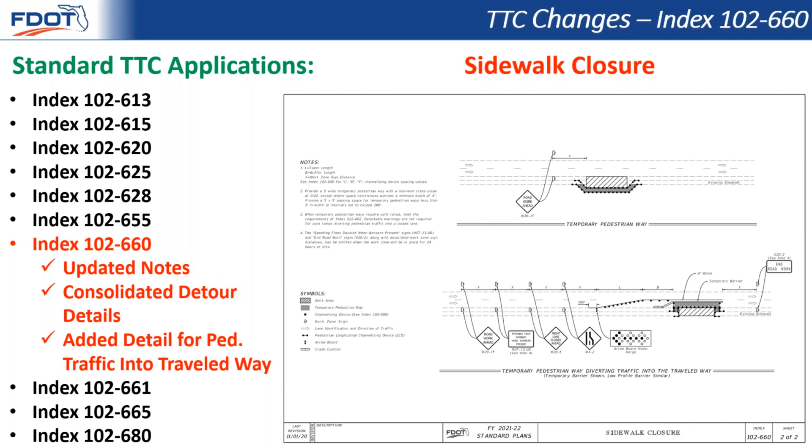This new detail is similar to the standard lane closure. However, a temporary barrier is added to provide separation and protection between the pedestrians and motorized traffic.

Let us now take a look at a completely new index, 102-661 for bicycle lane closures. This new index provides standard TTC application for bicycle facility closures, similar to the options that we just covered for the sidewalk closures index. The applications shown are based on concepts provided for inclusion in the next version of the MUTCD.

It is also important to note that the standard options included within Index 102-661 are provided to complement the bicycle accommodation guidelines provided in the FDOT Design Manual, Chapter 240. Sheet 1 shown here provides the basic requirements for channelizing devices and signage for a bicycle detour.

Again, keep in mind that the layout shown is very rudimentary. Proper consideration for the suitability of the bicycle facilities existing along the detour route are needed to ensure a safe and functional accommodation. The details illustrate a detour with a bicycle lane provided throughout.

However, other suitable accommodations may also apply. For example, paved shoulders along the detour route. See FDM 240 for additional guidance.

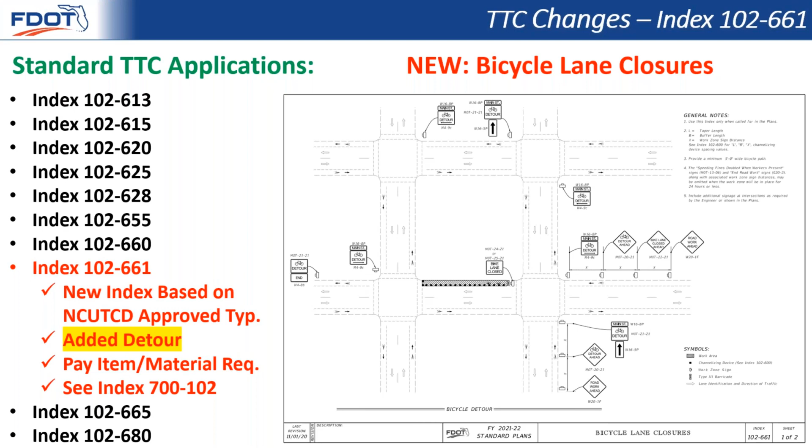Similar to Index 102-660 for sidewalk closures, Sheet 2 of Index 102-661 provides details for a temporary bicycle diversion and for diverting bicycle facilities into the traveled way. However, the use of temporary barrier is not required to divert bicycle traffic into the traveled way. Instead, channelizing devices are used to separate the temporary bicycle facility from traffic.

I would also like to mention that the pay item and diversion surface material requirements for the bicycle accommodations included within Index 102-661 have been combined with the pedestrian detour requirements and included in the July 2021 standard specification.

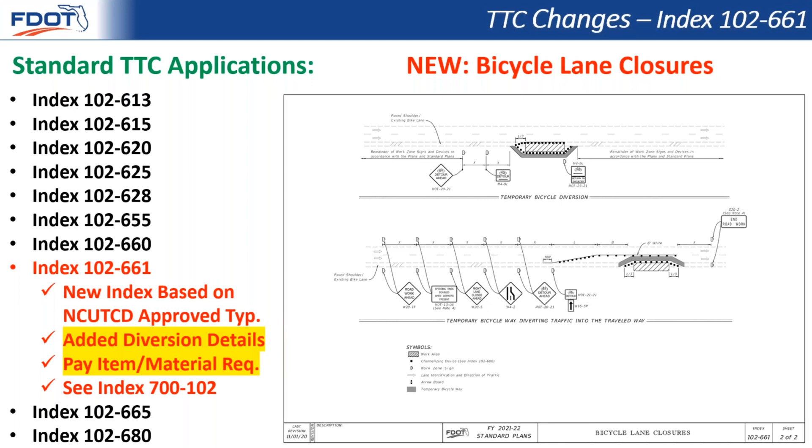Also of note is the addition of work zone signs for bicycle accommodations. Because the MUTCD has not yet been updated to include all of the signs shown in the new Index 102-661, Index 700-102, which includes special sign details, has been updated to provide the associated signs.

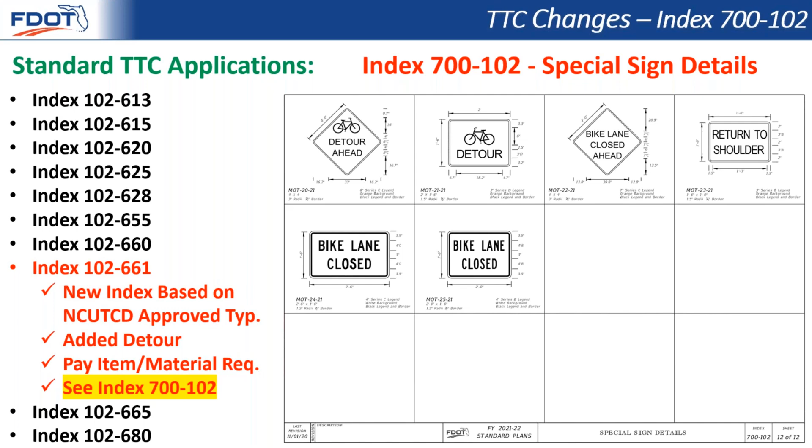Next is Index 102-665, Limited Access Temporary Opening. This index was updated to simplify the notes and consolidate the controlling usage policy into the standard specifications section 102.

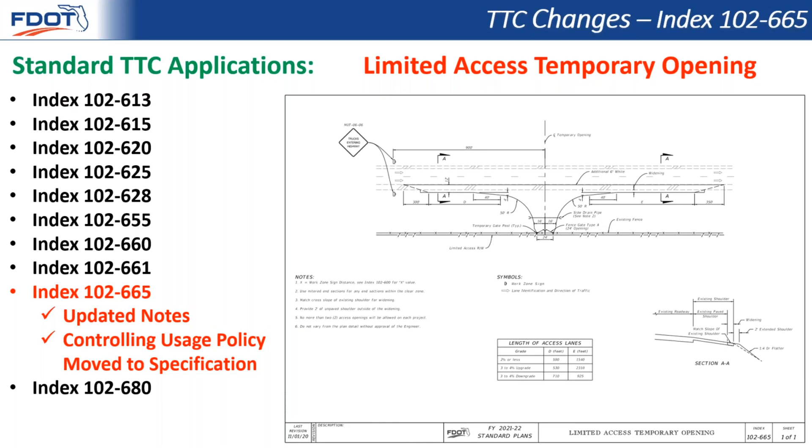And the final index we will cover is Index 102-680, Haul Road Crossing. As formerly mentioned, the haul road crossing details previously included within old Index 102-606 have been moved to a separate new index. This move was done to isolate this fairly unique situation into its own index. This will also allow the department to add another option for flagger-controlled haul roads in the future.

There was one minor revision to this standard TTC application, which simply updated the distance between the stop bar and the haul road for consistency with the MUTCD.

At this time, I would like to take a few minutes to highlight some temporary traffic control related revisions to the 2021 FDM. The first is the addition of a new Transportation Management Plan form. This form is now required for all projects, significant or not, to document compliance with the Code of Federal Regulations, which has specific requirements for developing transportation management plans, also referred to as TMPs.

Oftentimes, the development of a TMP occurs through the project development and plans production process without being recognized as a formal TMP. The vast majority of department projects contain the required components, that is, a temporary traffic control plan, operational strategies, and public involvement. Therefore, this new TMP form will allow the department and consultants to document the activities already being performed as a transportation management plan. The form can be accessed within FDM Chapter 103.

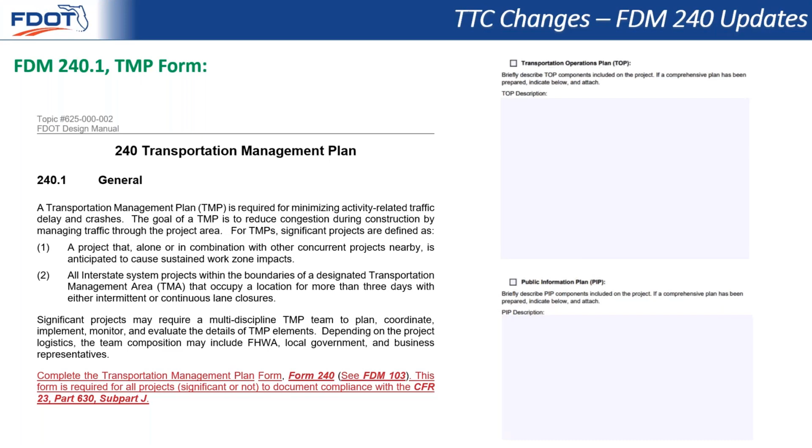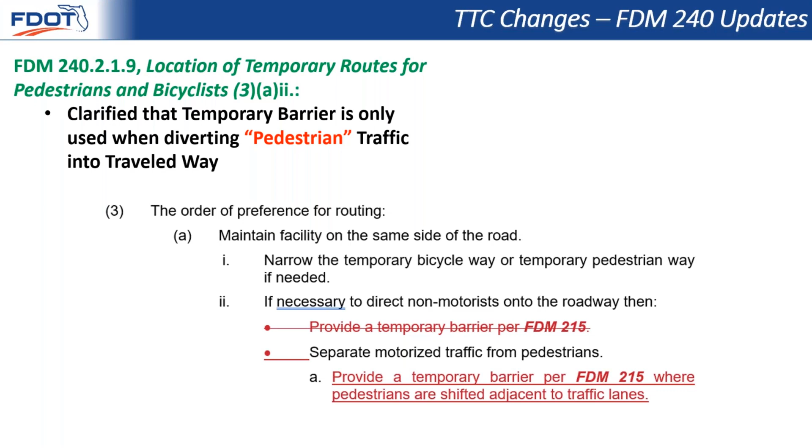FDM Section 240.2.1.9, which covers guidance for locating temporary pedestrian and bicycle routes, was also revised to clarify that temporary barrier is only used when diverting pedestrian traffic into the traveled way.

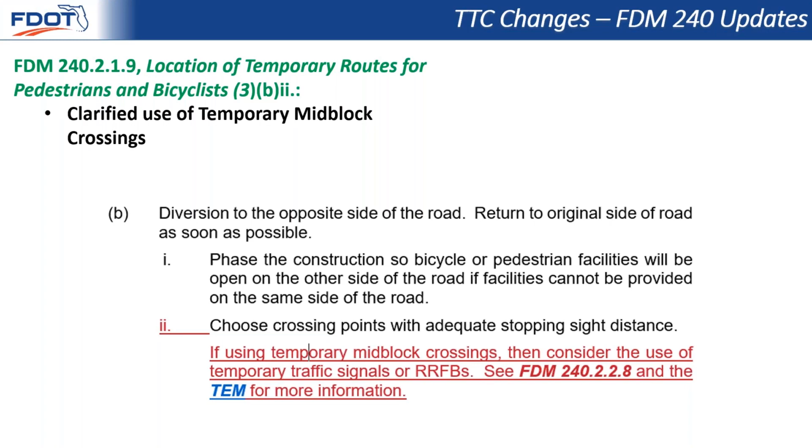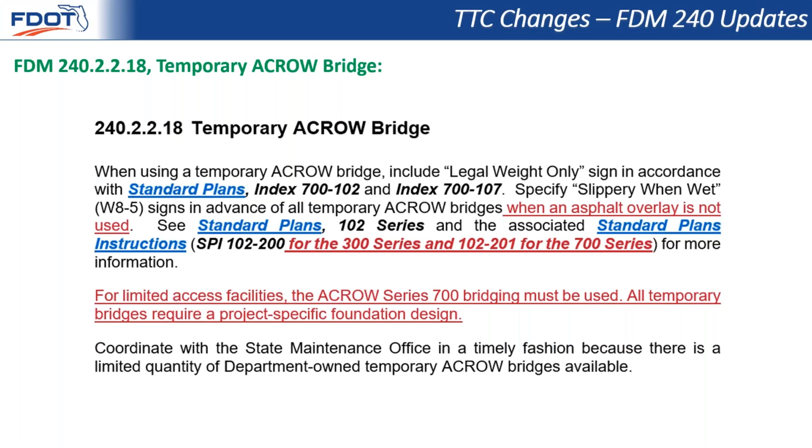At the time of recording this webinar, the July 2021 standard specifications are still in the development and review process. For the final version of the associated revisions discussed during this webinar, please refer to specification 102 once the July 2021 specifications have been published.